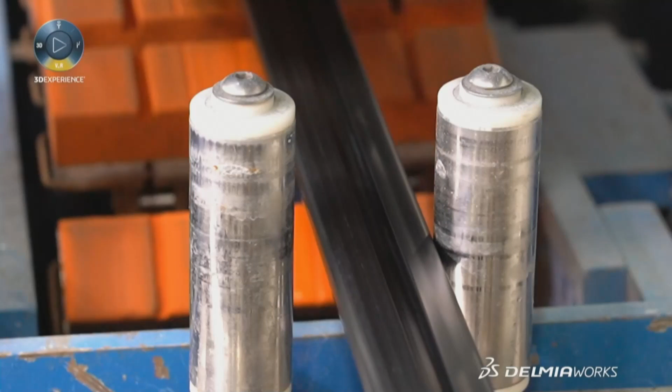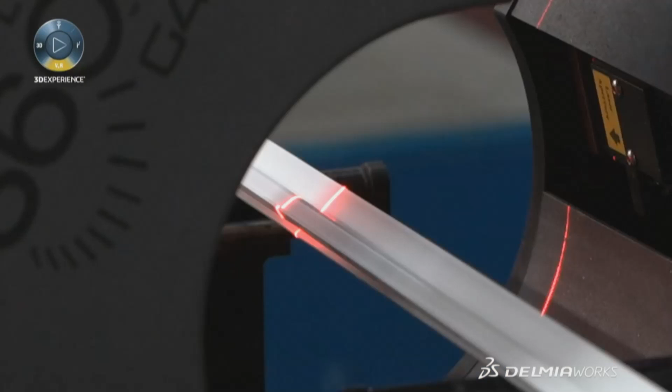Fabricated Extrusion Company is a plastic extruder. We make custom profile and sheet extrusions. We would not be where we're sitting here today without DELMIAWORKS. We all know that—we could never have grown the way we've grown over the last 4 years. It's affected every aspect of our business, and it operates every aspect of our business.

Order entry, production scheduling, inventory management, barcodes and scanners, shipping and accounting. We also utilize the real time system to monitor production and productivity. We're totally dependent on it.

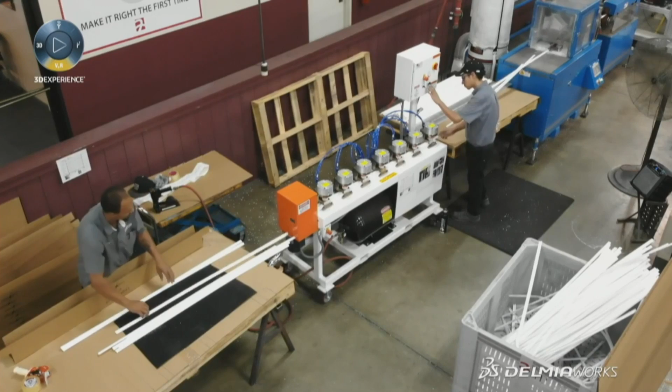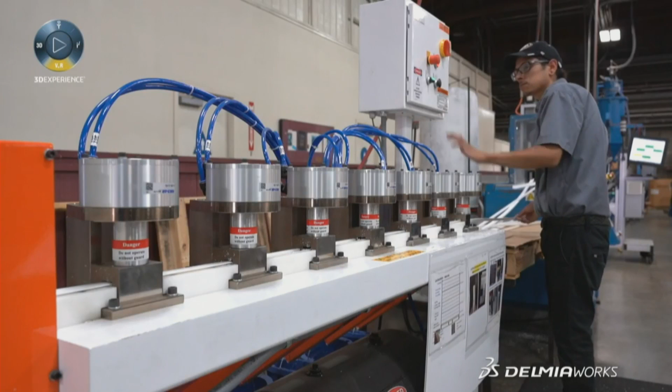Waste is something that we want to avoid in all aspects of our business. And so anytime we can implement a program like sustainability, it achieves greater productivity, greater profits, and it appeals to us as people—that's the main impetus. It's both financial and as human beings, we feel like it's the right thing to do.

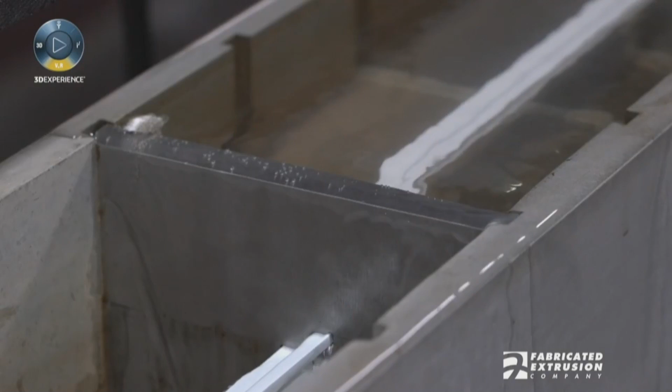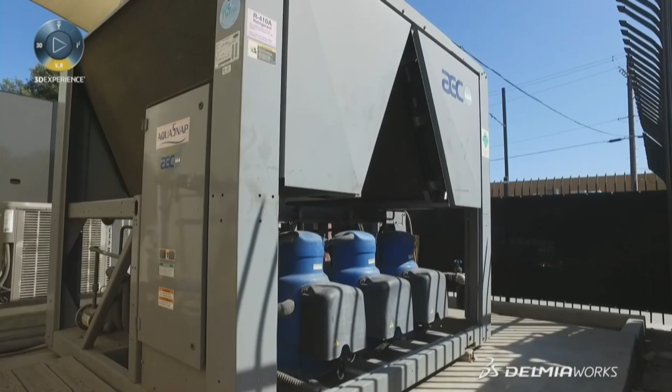We are focused on sustainability in 4 major areas: water reclamation, energy consumption, trim buyback from our customers, and solar energy. In order to cool our extrusions, we would use millions of gallons of water per month. We now capture that water before it goes out to the sewer. We chill it, clean it, and pump it back into the facility to continue to be used.

A lot of our extrusions are used by our customers. They're fabricated or processed on the other end, and so that trim scrap gets collected. We will actually bring that back, and that way we help our customers keep it out of the landfill.

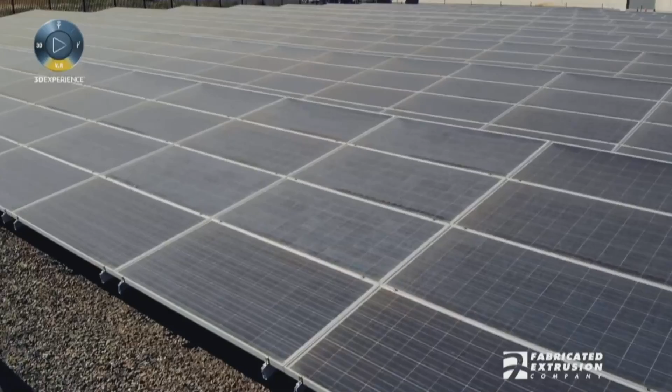The biggest thing we have going is our solar energy generation plants. We're getting about 35 to 40 percent of our power needs from solar. It actually gives us a leg up—power is a big cost factor in our business.

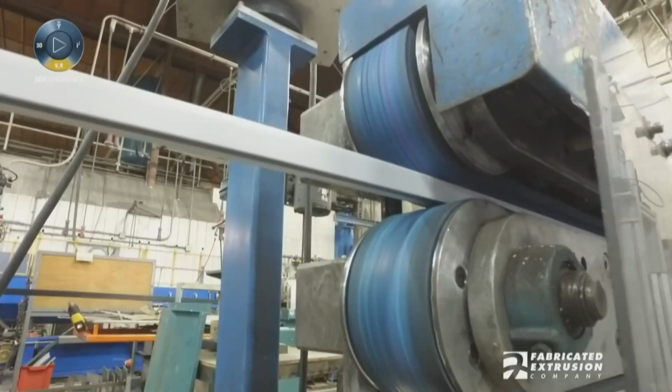DELMIAWORKS system allows us to track our granules throughout our process. There's startup and tear down materials that get wasted as you're trying to get your profiles on size. And so that material then gets granulated and reprocessed.

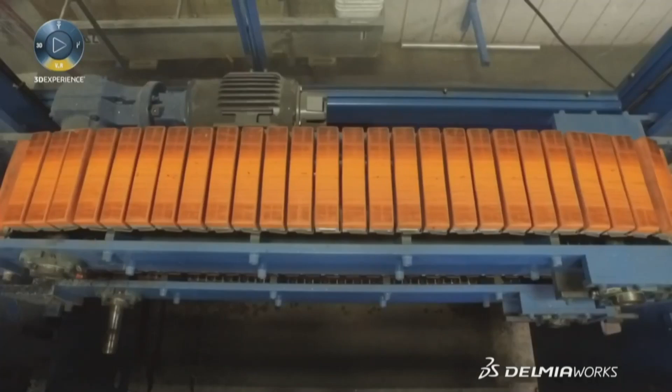What the DELMIAWORKS system has done for us is allow us to track that in every step of our process. And by doing that, we know to the pound what's out on the floor. It's made us much more efficient, much more profitable, way less waste. Just by knowing where everything is, being more efficient in the reuse of it, we're able to capture the full value of those materials. DELMIAWORKS has been a huge part in our success in that area.

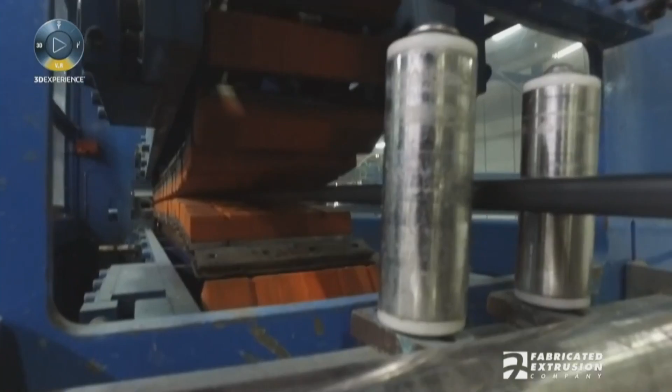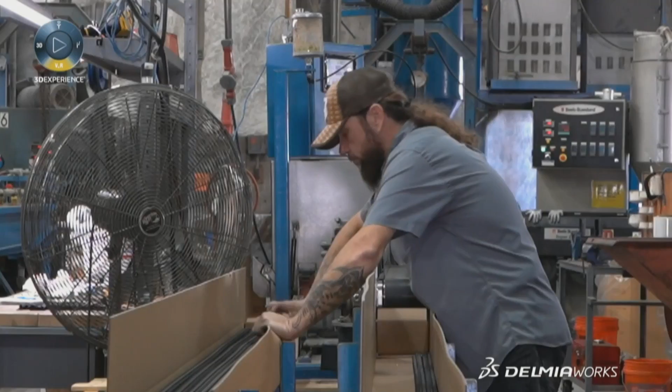The other place that DELMIAWORKS is beneficial to us has a lot to do with conservation, and that's conservation of time. DELMIAWORKS has changed the game for us as to how people do their job. We have very dynamic production scheduling because we have so many different tools, and not only are they different tools, but we typically run different plastics or different colors through those same tools.

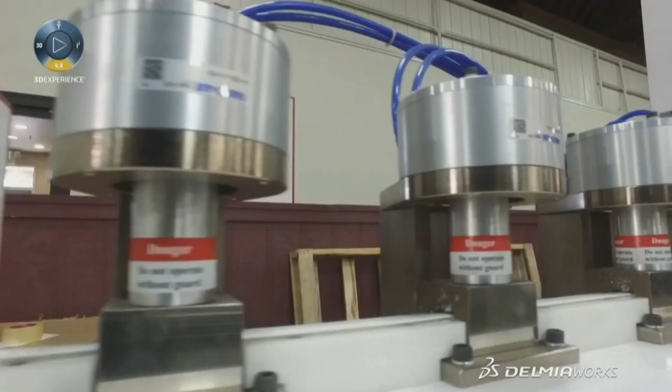With DELMIAWORKS, we've taken a lot of our processes from essentially a guessing game to data-driven processes. We're all in constant communication with each other on what is coming up next. And in that, we've had an enormous boost to our efficiency because it's cut down on time wasted.

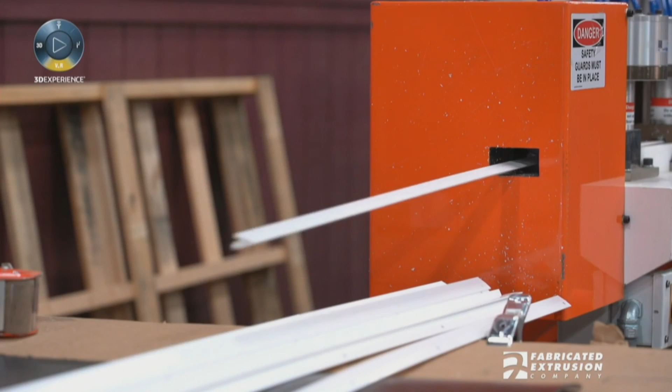Our sustainability program is our water reclamation, it's our energy conservation, it's our solar energy, it's our trim buyback program, it's managing our granules in our system and throughout our process. And DELMIAWORKS has been vital to making that a success.

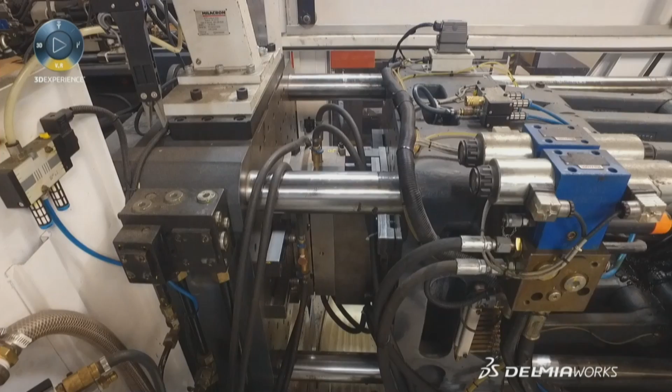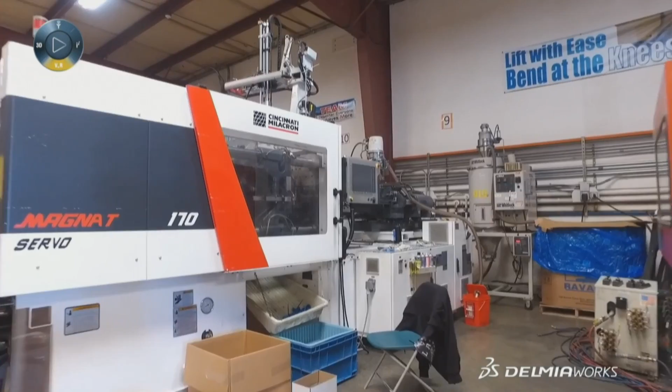Select Plastics is a full-service custom injection molding company. We take our customers' ideas from concept into reality. One of the biggest gains and the biggest goals we had for DELMIAWORKS was to know what our actual costs are.

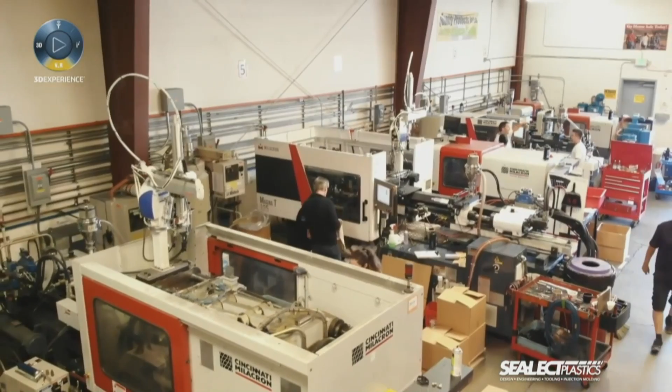When I quote a job, I get information from my customers, which could be a sketch on a napkin, so to speak. And it's very difficult to put a dollar figure to a sketch on the napkin. So what needs to happen first is to take that sketch and convert it into a CAD file. And Solidworks has been helping us with that for decades.

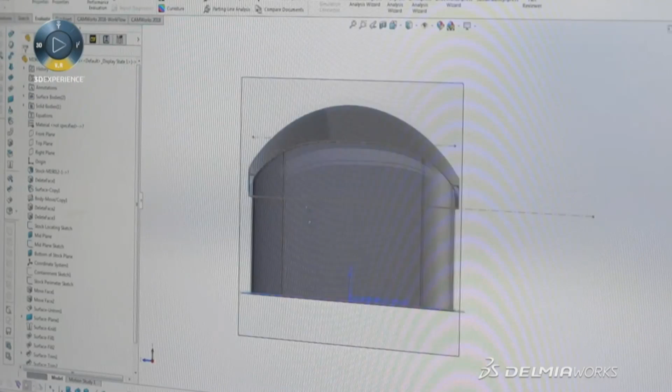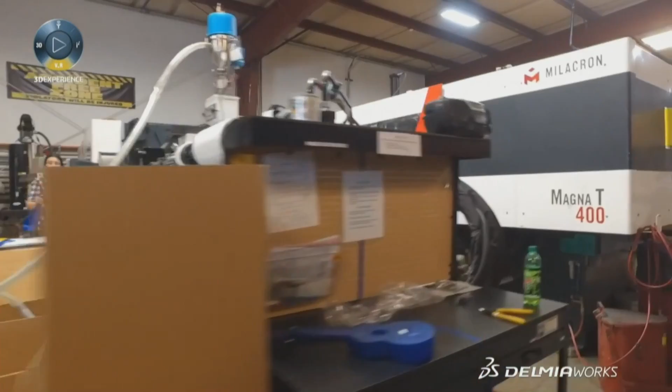I need a lot of information from this CAD file, like part volume, for instance, or critical dimensions. That data helps me with my information from DELMIAWORKS, where I get all the information from the quoting module, to then combine the numbers and get to my customer with a precise quote very quickly.

When we receive a design or a concept from a customer—a two-dimensional sketch, for example—we'll go into Solidworks and build that part up from that two-dimensional sketch. We'll use different extrusions and surface manipulations to build it up essentially from scratch.

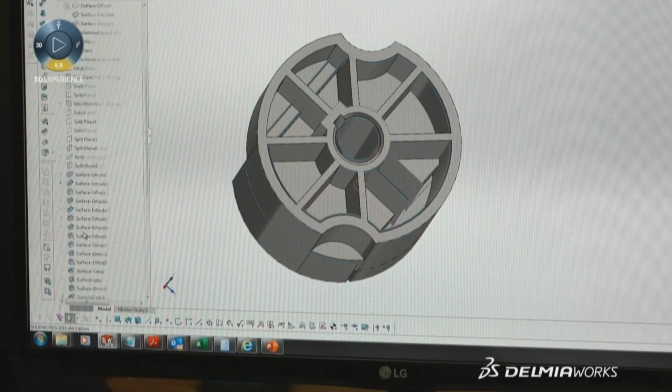Once we have that part designed up as a three-dimensional part, we'll add draft and we'll start looking at it from a design and molding standpoint, design for manufacturing. If we get a part that's already a three-dimensional part, we'll perform a similar analysis.

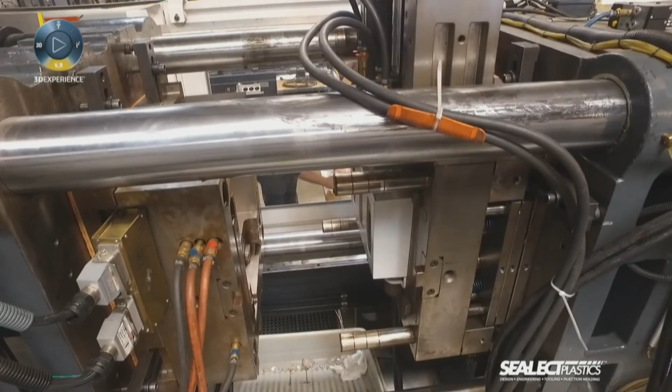We'll also use tools within SolidWorks to look at part volumes, wall thicknesses, all of which are going to affect how well or how easily that part can be molded and how well the end result is going to match up with the customer's original design. We don't want our customer to have to go back to a different designer or design house, or even necessarily make these modifications themselves.

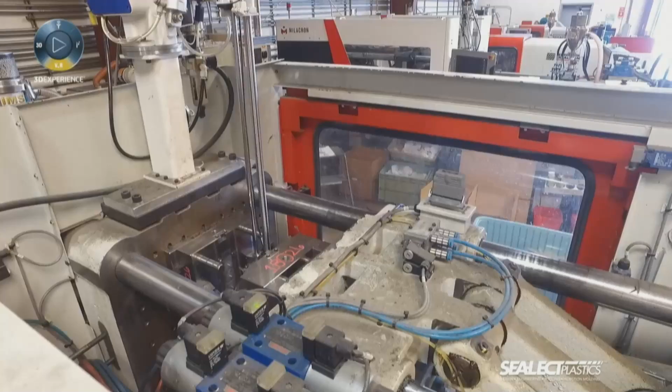So if they convey to us what it is that they need their part to do, we want to be able to take that part and modify it, redesign it, do whatever adjustments need to be made, eliminate the additional steps.

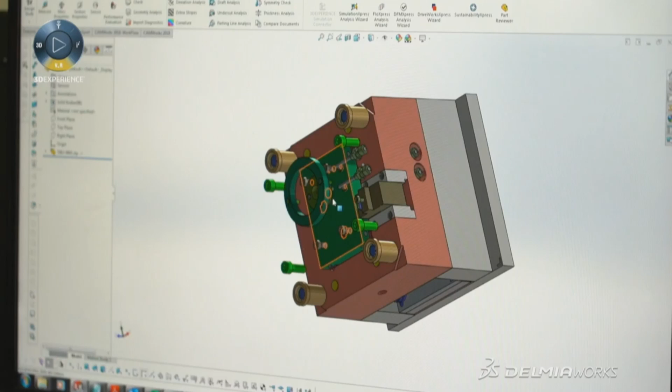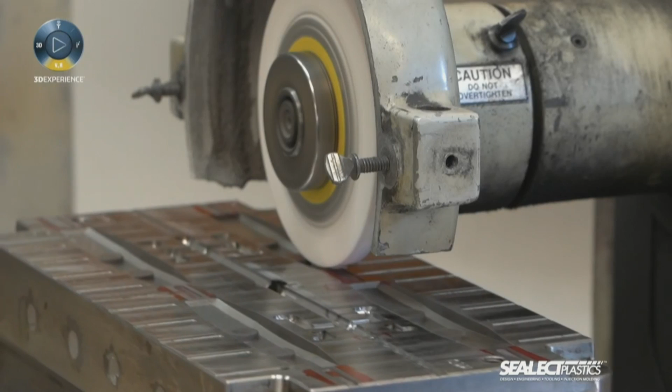And take it straight to tooling and injection molding. When we go into tooling design, we'll quote out all the materials and estimated labor costs. That's where we start rolling into the DELMIAWORKS side, because we capture all of the tooling, materials, labor costs, everything associated with that project, all within essentially one portfolio. That helps us understand specifically what went into the project, and that's also the basis for everything from then on out, because at that point the project is assigned a tool number and labor costs.

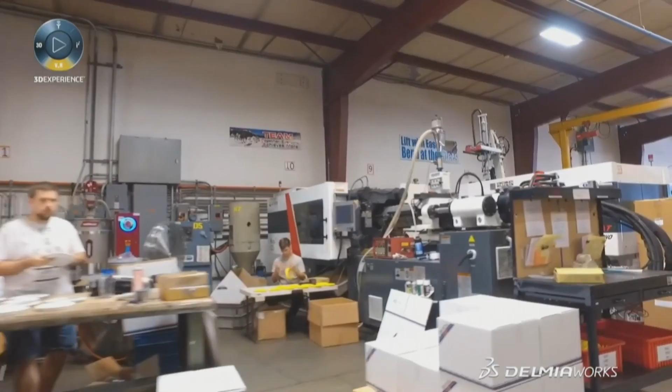That transitions all the way through to manufacturing and injection molding. We're doing quite a few products in the marine industry. We're also doing some products for the military. The biggest challenge where DELMIAWORKS is extremely helpful is the documentation and the repeatability.

When these items are being set up in the system, we are required to follow strict cybersecurity protocols, and so the data has to be secure in the system. We have the server set up specifically so that DELMIAWORKS and SolidWorks are all in a vault, so to speak, so nobody can access them who's not supposed to.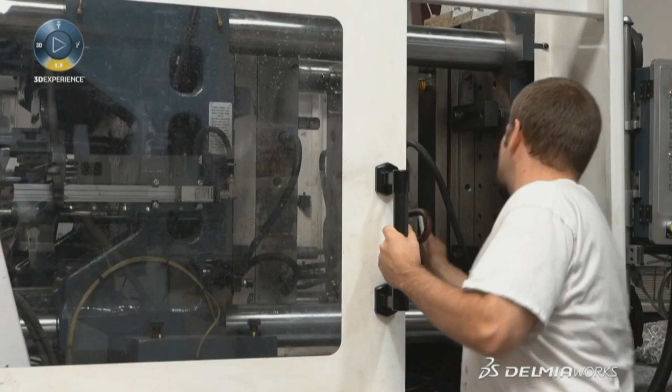But then it goes further into details like lot control. We have to document to our military customers exactly which material has been used, and we have to document the lot numbers. We have to send out COCs to our customers, and all that is being tracked within the system. The combination of DELMIAWORKS and SolidWorks is really extremely helpful for us.

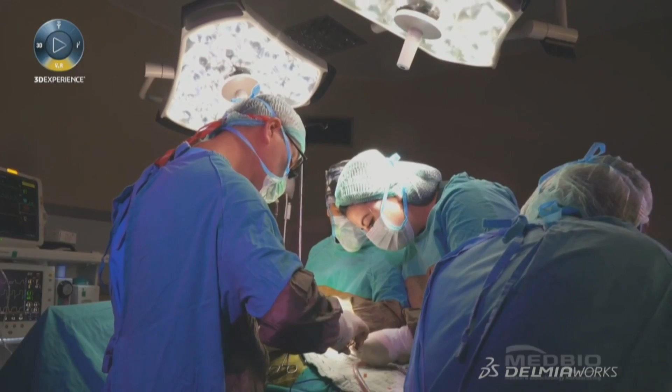MedBio is a medical device contract manufacturer. We are a tier 1 supplier to OEMs. In the medical device arena, we do a lot of cardiovascular surgical products. The majority of our products are disposable, but implant products, when you walk off the operating room table, you have our product with you for a considerable amount of time.

Every business goes through a transition or a change of ownership. Every business does. MedBio is in an industry that's being rapidly consolidated, so my competitors are being bought out by private equity firms. They're being bought out by strategic interests, and our customers are wanting to work with just one big supplier.

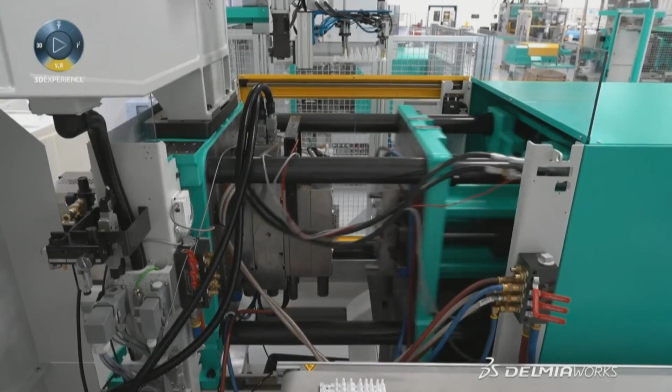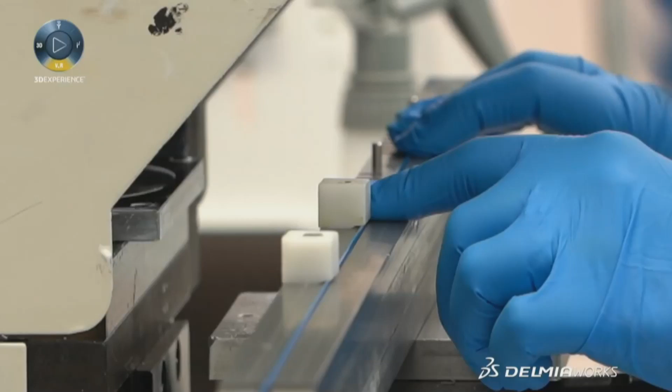That, combined with the forces in the industry and the fact that we'd really like to grow at a more rapid pace, led us to look for a private equity partner. I have a pretty extensive background in mergers and acquisitions, so I conducted the process myself, which led us to partner with a private equity firm.

That partnership has already allowed us to acquire another company on the other side of the state that's also a complete medical device molder — that's all they do is medical device molding. And it effectively doubled the size of MedBio within a year.

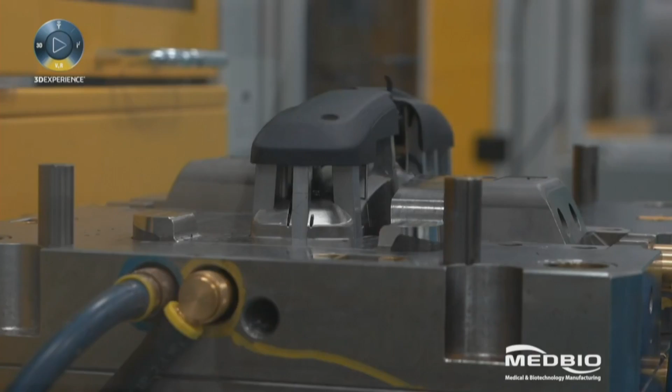There's a term most people should be familiar with called due diligence. In our case, it was literally a 60 to 75 day window where we provided all of the documentation and information needed for our private equity partner to make a decision, not only on whether they were going to buy us, but what that purchase price was going to be. Pretty critical to everybody involved.

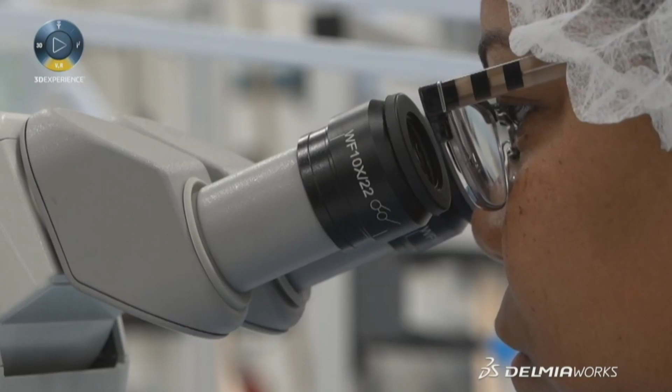DELMIAWORKS allows you to provide data to not only yourselves, but potential acquirers or other investors in multiple different ways. You can slice and dice data in many fashions — by customer, by revenue stream, by profitability, by work center. You name it, you can do it. DELMIAWORKS allowed us to provide our potential partners with information in a rapid fashion that there's just no way we could have done without a proper ERP system.

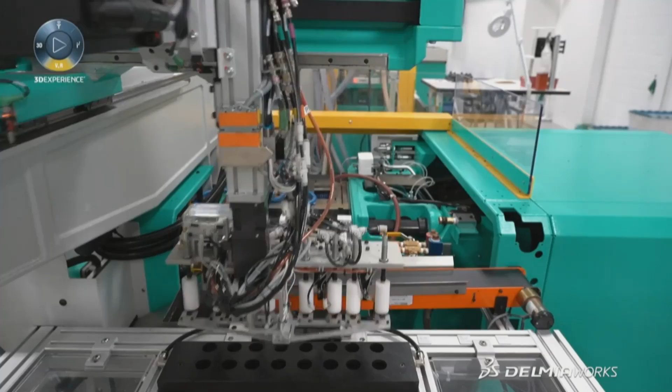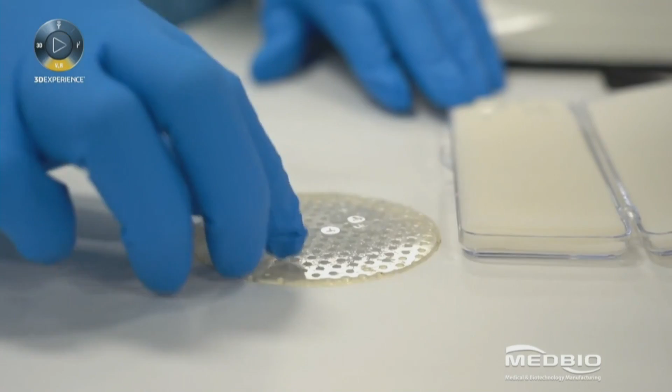The other thing that's important about DELMIAWORKS is that somebody acquiring you wants to make sure that you can handle potential growth. One of the big things they're looking for is capability and your ability to expand at a rapid pace. If you don't have a solid ERP system in place like DELMIAWORKS, you're going to have a hard time expanding or acquiring. DELMIAWORKS really provided us access to information at our fingertips.

We had all kinds of consultants that Graham Partners, when they acquired us, hired, and they wanted everything from operational reports to financial reports, most of which we had already, but some of it, we'd do a quick modification to a report and we have the information they need.

So it was extremely helpful. The first acquisition we made happened to have DELMIAWORKS, and we actually helped them pull their data and create reports with our staff, and that made it much easier and much quicker. If you look at when we made the acquisition, it was a smaller company, they weren't quite as sophisticated. Had they not had DELMIAWORKS, we probably would have been sitting for days and days working with spreadsheets, pulling old reports.

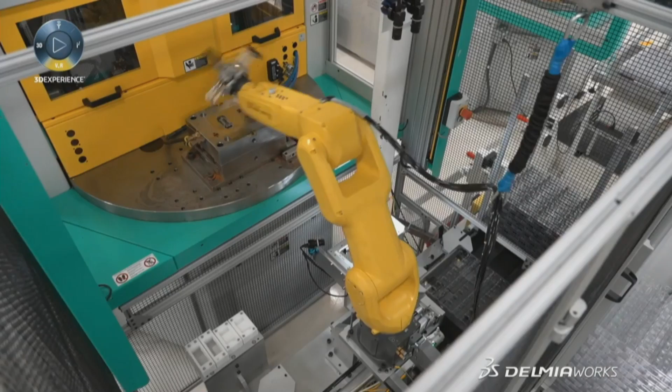Ever since we've acquired that company with DELMIAWORKS, everything has gone fantastic. It's smooth. We're now getting the reporting that we need. You've done a great job at doing that. If you don't have a current ERP system in place and you're thinking you would like to acquire somebody or be acquired, you're probably not really at that stage where you want to do that yet. You really need to be at a stage where you have your ERP system in place and up and running. And for us, DELMIAWORKS was really the one that made the difference.

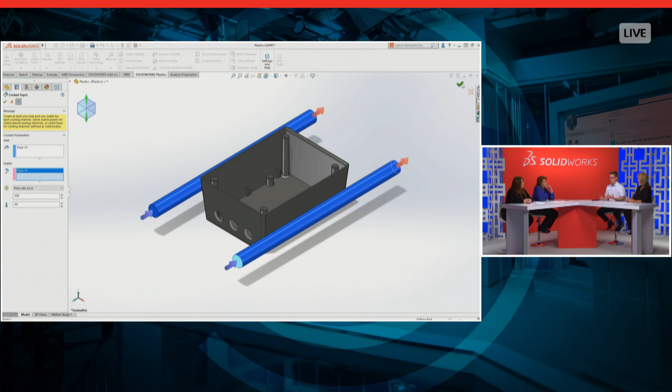I can actually predict any manufacturing defects before we cut any steel. We can optimize the fill, the pack, and the final shape of how that part is going to turn out, so I can optimize the quality and change the design to get it ready to make it right the first time.

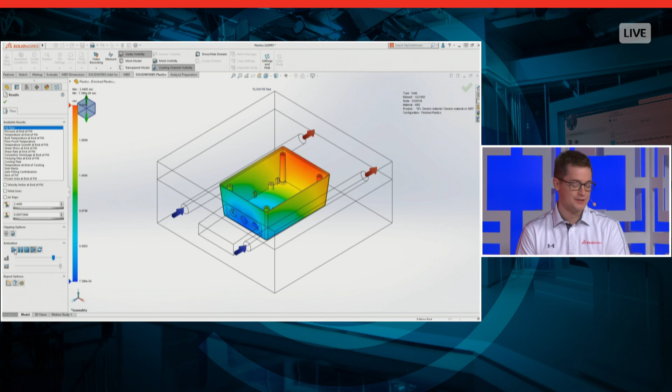But there are other tools—SolidWorks Inspection for creating inspection documentation, which will come in when we talk about quality a little bit later, or SolidWorks Composer to create assembly instructions so that technicians on the shop floor know how to assemble these products with ease.

I think ease of use is going to be a big piece of today's conversation. So Sue, from your perspective as a client executive, I can imagine you've been to a couple shop floors.

I have, and I actually started my career working on a shop floor, programming NC and CNC machines. So anytime I go into a new company, the first thing we do is take a tour of the shop floor. It helps me understand not only their manufacturing process, but really how the entire company operates just by walking through the shop floor.

Yeah, and Bobby, as an implementation specialist, I can imagine that's where you start. It's where I start, it's where I live, it's where the implementation ends. The shop floor is a very personal experience for me. My mother was in injection molding on the shop floor for over 30 years, starting in upstate New York with a large toy manufacturer, moving us out to the Midwest and working in automotive.

One thing about working with the shop floor, you get a chance to develop relationships and experience different personalities, and creating a collaborative effort and bringing the shop floor into that business process improvement is extremely fulfilling. Whatever you can do to make somebody's job a little bit easier and their day a little bit better is very rewarding.

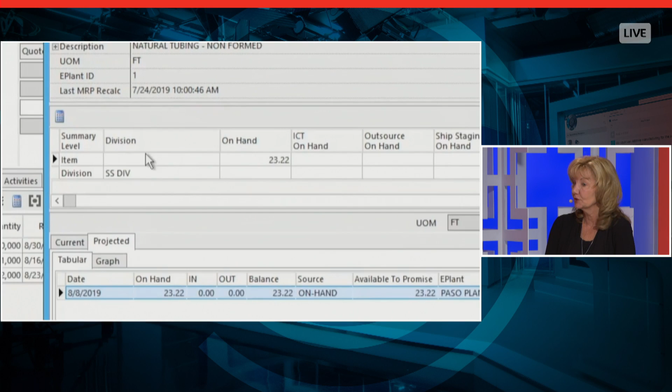And they have a choice. They can say yes and then live with the consequences, or they can say, I need more information, I need to go back to my company and do a little bit of research, and I'll get back to you in a few hours or a few days. But what I hear is that often when that does occur and they do get back to their customer, they have lost the job.

It's been awarded to somebody else. Yeah, from the design side, if I've made a part, I need to get it made. I call a machine shop, hey, can you make this? They say, let me look into it, I'll get back to you. Guess what I'm doing? I'm calling the next shop. Right, that is so true.

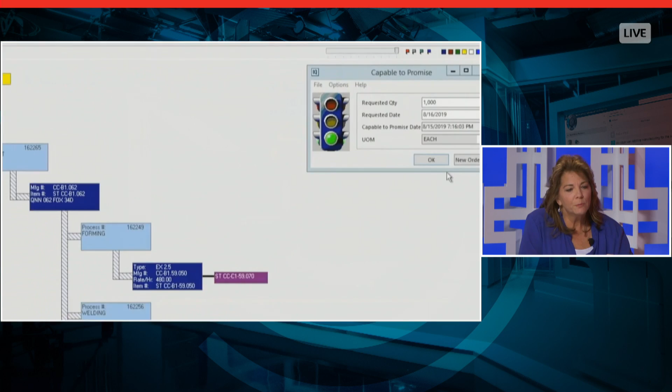DELMIAWORKS addressed that very issue, because it's all too common. They did so through the use of capable to promise, which allows us to see in the system in real time: do I have enough parts to send out to you today? If not, when can I fulfill the balance of that request? Capable to promise gives you that access and ties directly into sales and the production floor.

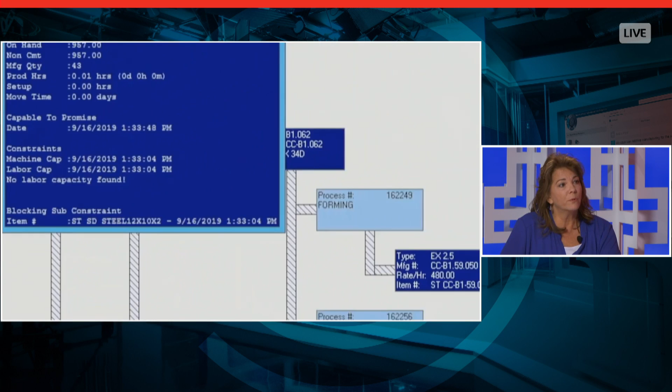This is part of the ease of use DELMIAWORKS brings, giving kind of a go/no-go gauge to the salesperson, and being able to drill in and say, well, if I can't meet it, why not? Is it a machine issue? Is it a resource issue? Are there not enough people? Materials on time? And if we push it out to another date, will it work? It gives me instant feedback. So there's a little bit more that goes into getting the order, because it's like, if I get the order, now what?

Right, there's a lot of intelligence already in the system. Bobby, can you tell us more about what's in there? Sure, getting that order is great, that handles now, but what about tomorrow? What about next month? What about your planning aspect?

With the forecasting and budgeting module, you can do both financial planning and production planning, and drive that demand through MRP and fill up that pipeline, so you can plan accordingly your capacity, your labor, your materials.

I've seen, when I've been out to shop floors, magnet boards, whiteboards, hot lists, Excel spreadsheets, trying to manage all of what's going on in the operations of the shop. From the sales perspective it's like, great, I got the order, okay now what? You've got to figure out all the different moving pieces and what goes where to deliver on that promise. But here we can be confident in making those promises while you still have the customer on the phone. The data is readily available, that's the big piece of it.

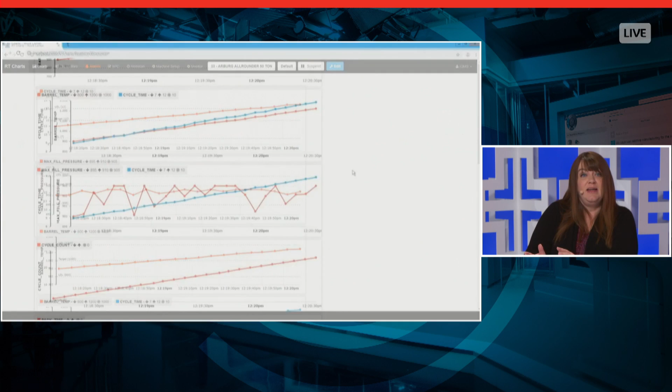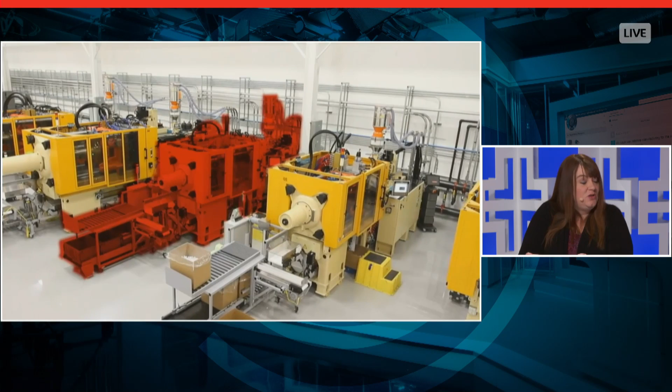On the other end you have process monitoring, which is really quality and engineering driven. Your customer may have very exact specifications you need to follow. Are you making those parts to those exact specifications? Is your machine running hot? Too cold? Is the pressure too high? So real-time process and production monitoring provides mountainous amounts of data that can be turned into KPIs and dashboards immediately, so you can review it.

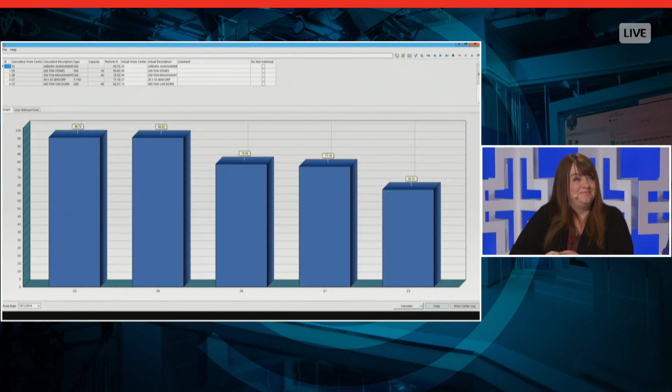You mentioned mountains of data, and what I hear from executives and business owners is, that's great to have all that data, but there are three or four KPIs that I live by, and I want to be able to see them at any time, day or night.

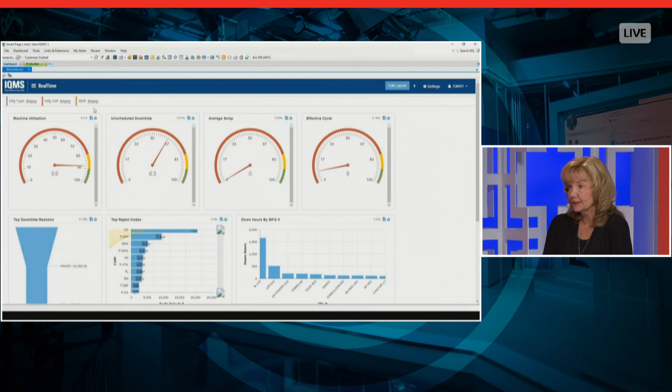Both of you mentioned production monitoring, process monitoring, the KPIs. Our system, DELMIAWORKS, provides instant real-time visibility, clear tangible data that the executive can see from his office - what is driving those KPIs - from a smart page BI dashboard all the way down to the end users on the production floor, so they can respond instantaneously to what is going on. Through smart page, shop floor user interfaces, all those applications allow us to respond and proceed in real time.

And these are configurable, right? So if it's getting information from the shop floor, and putting information back to the shop floor too, for this real-time monitoring, feeding it from the shop floor to the top floor, we can identify any issues and act on them right away to make sure the business is profitable.

But from a mom and pop shop, this is a solution that can grow. It grows with you as your needs increase. You've got more people to hire, more machines to include. It's scalable.

There's a lot of great points here, and depending on the shop, whether it's plastic injection molding or a sheet metal house, there's so many different types of data that DELMIAWORKS can gather to improve operational efforts. We don't have enough time today to talk about all these examples, so I encourage folks at home or at their office to go to 3ds.com/DELMIAWORKS to look at other case studies, white papers, and customer success stories to see how customers are putting this into practice.

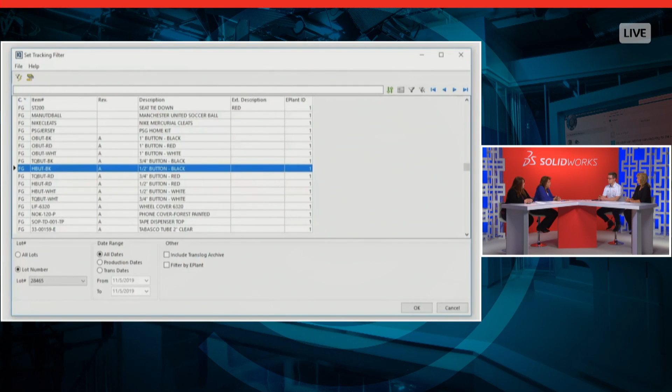I want to go back and add to what you both just said - we're talking about these small to medium businesses, the mom and pop shops, that through use of the system can scale their businesses. But quality is such a critical point to that. Our quality modules provide clear, defined data, so they're not drowning in those quality data points.

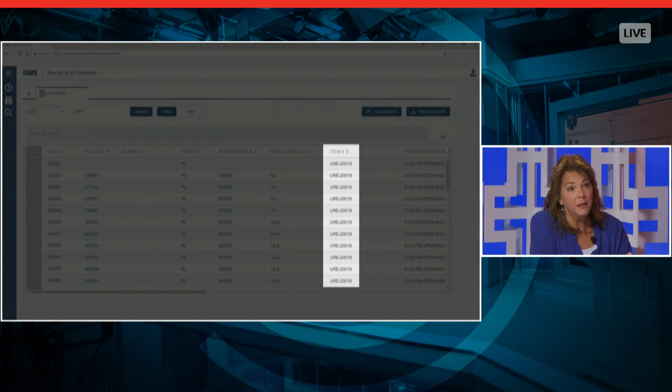They can actually see, through engineering change orders, through corrective actions, through deviations, all of that from the time the material comes in the door all the way through the production process. So DELMIAWORKS provides, through our quality modules, those key points of quality data, even to the small mom and pop shops.

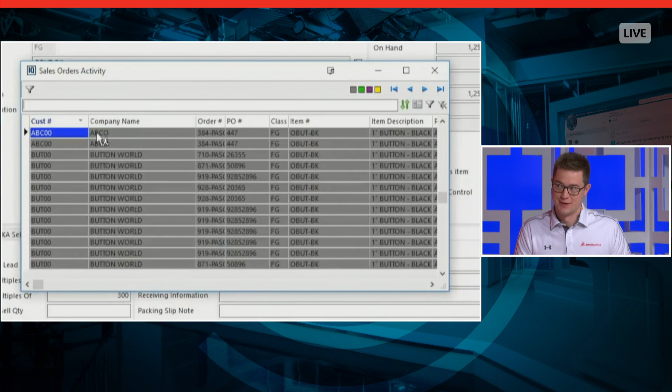I know about engineering change - if I've got to make a change to a part or an assembly, I've got to be concerned with what drawings I have to update, and where else this part or assembly is used to understand what work I need to do as a designer. And Solidworks tools provide easy to use solutions to do a where-used lookup, to easily find where else I have to touch the different data to get my job done.

And it sounds like it's very similar with DELMIAWORKS, essentially doing a where-used. So if you have material, and you've got a lot number, you plug in that lot number to see where it's used, so we can address whether we sold anything that has this, or if it's all in-house, so we can identify and address the problem and get it fixed as quick as we can.

The great thing about that, Michael, is all of that information is on demand and at your fingertips for that design engineer. And even though that's a small part of the big picture, what's critical is you can broadcast that information and communicate it in a workflow to the rest of the organization. So you can prevent obsolescence, look at your capacity immediately, and know if that change is going to affect other customers. That's one nice thing about this system - it's all inclusive, and you get rid of the silos and open up communication to everybody.

That's a good point, because using these quality modules, you can look to see the various statuses of the material - where is it at in that pipeline? How is this going to impact downstream versus upstream, and help me better prepare my plan of action? Right, taking that action requires making some changes.

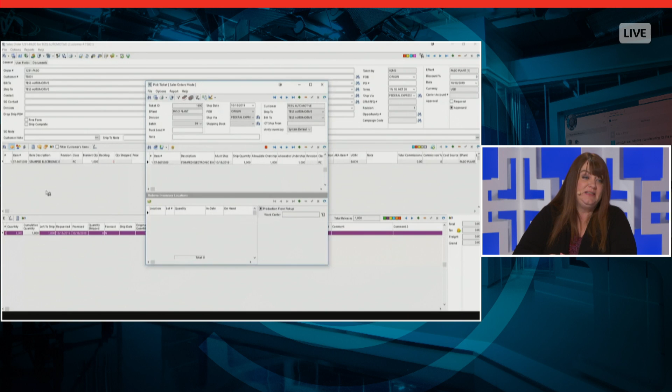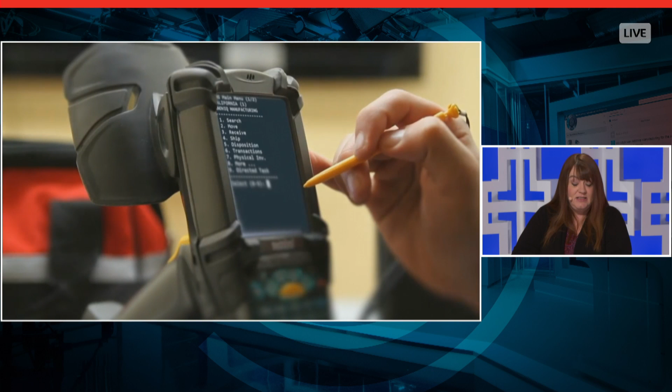Sure. Your warehouse is also a very unique entity of your organization. They are the material movers, which is critical in any manufacturing process. So the scanning and labeling within DELMIAWORKS is extremely useful. The labeling templates alone are extensive, and people kind of use labeling as an oversight. I had a production manager in my last implementation who came in the room during a kickoff and said, if you do not print a label on day one, this will be a fail.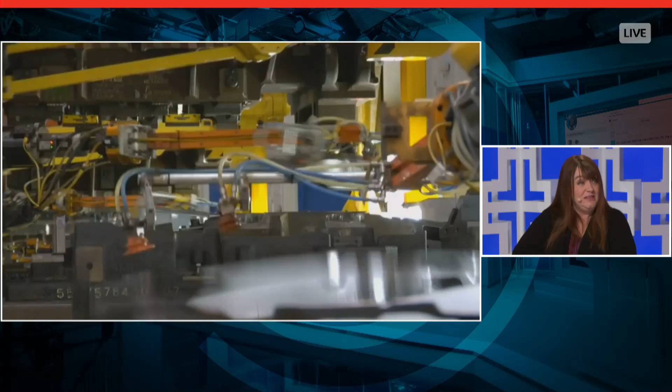Everybody kind of laughed and snickered, not realizing that label is very important. You receive your inventory in the door with that label, you ship it out with that label. Your customer has very specific requirements for that label, so DELMIAWORKS really helps to facilitate that process.

It's interesting that you would say that. I was with one of our customers last week, and they're using DELMIAWORKS, implementing automatic label generation in each of the work cells. Great feature. What it really boils down to is every time we touch inventory, we lose money. So inventory is money. And when I have the ability to see my inventory - where is it, how much do I have, and can I use it - these are all vital, key pieces to the flow of my warehouse.

Yeah, and then there's a cost there. Every time you touch that inventory, it costs money. And of course, moving inventory, that warehouse management is a fraction of the cost. There's multiple pieces to be concerned with in terms of the finance picture.

So let's talk a little bit about this, because we're making parts, we're making quality parts, they're getting out the door. But are we making money? Are we profitable? I hear that a lot as well, and I think most business owners know they're making money, they're profitable. But what they don't know is exactly what their margin is, and that's a difficult thing to quantify, but it's very important. In order to grow your business or acquire other businesses, you need to know what your margin is, and you need to maintain a specific level.